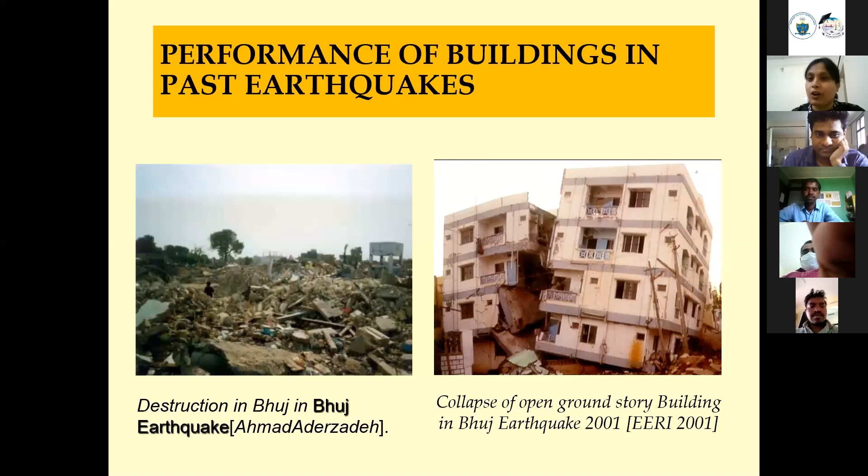There is nothing remaining. The next photograph is of RC buildings. There is huge damage, it cannot be used, it is not usable anymore. But there is not complete destruction because of its strength, and by our intuition we know that RC structures will be stronger than masonry structures. It's our intuition, we have seen it over the years, and now I will talk about what makes it stiffer and stronger.

These two photographs are of high-rise multi-story apartments. You can see on the left the collapse of the Taksila apartment. Those were identical twin towers, but one has completely lost its ground floor, so it loses one complete story, but there was not complete collapse. On the right side, you can see there is an overturning kind of moment, and it actually overturned on the front face. Why this happened, I will discuss.

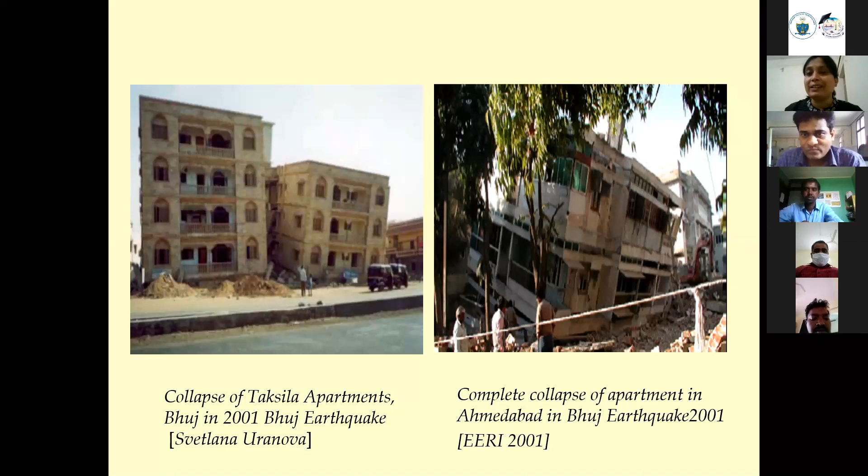So after looking at this, the question in my mind was, why did it happen? What can I do? Later I came to know this is called seismic risk assessment. Why do we do seismic risk assessment? It is to actually quantify the loss in terms of economic loss and life loss, or even the damage or severity to human beings that is going to happen for a particular level of earthquake.

Or let me say, ground shaking. Why do we need to understand and quantify it? Just to prepare for the worst. How can I help? How can I reach out to the people if such things happen?

You know that 80% of Indian land is seismically vulnerable, and India is one of the most seismically active regions of the whole world. So people who love to study earthquakes, they come to India.

So quantification is for long term and short term mitigation policy. And for important buildings, there are insurance companies, so they need to know the risk beforehand. They give the insurance, like our car insurance and so on. That's why we need to quantify the amount of losses, which we call seismic risk, in terms of economic loss and life loss, for mitigation policies.

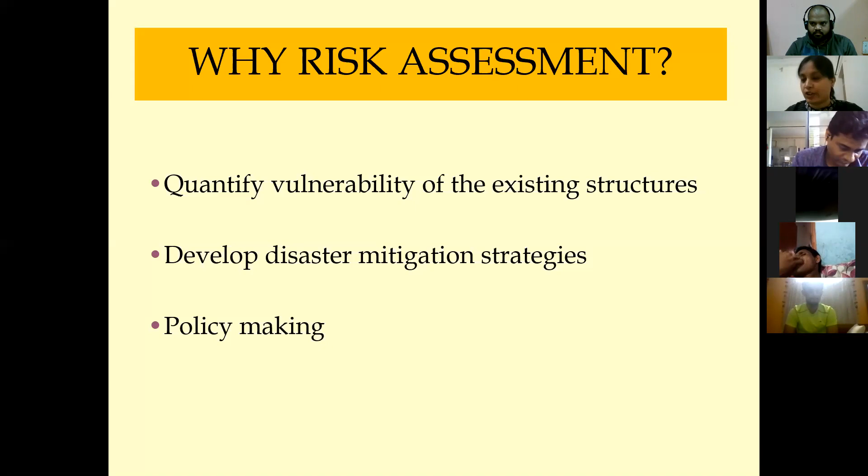Now, seismic risk is a combination of three different functions. What are those? Seismic hazard, seismic vulnerability, and exposure. It's a combination of these three functions.

Now, one by one, I will explain what seismic hazard is and how we can quantify it. As a civil engineer, we need not only to understand... what is it, two participants raised their hand, what happened?

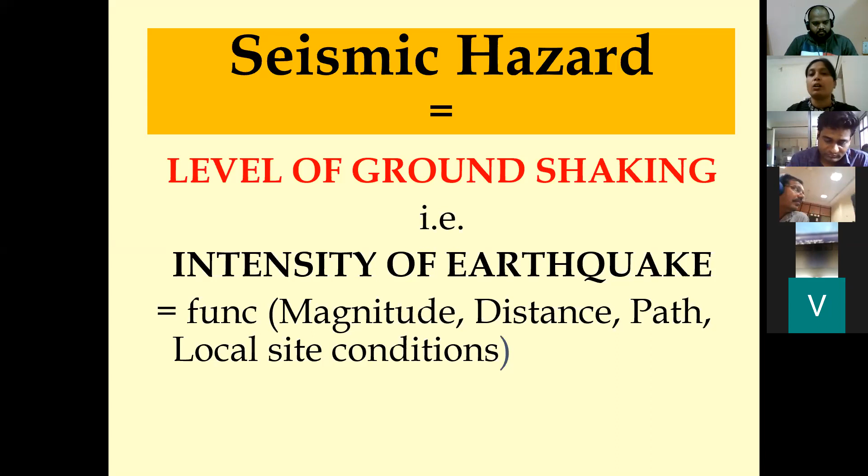How do we represent seismic hazard? We can do this through the design response spectrum, which is well known to all of us. It gives the peak response of a single degree of freedom system under earthquake excitation, for numbers of earthquake excitations, and then it has been smoothened using some statistical analysis, so that in the design office it's very easy to design for the maximum acceleration.

Why are we interested only in acceleration as structural engineers? Although seismologists are very much interested in fault size, length, magnitude, as structural engineers we are very much interested in acceleration. The reason is, being a structural engineer, we want to know how much is the external load coming to my structure. And the stress caused by the external load should be less than the internal capacity of the member, then my structure is safe. So during an earthquake it is not a force...

Earthquake only vibrates the ground, because my foundation is laid on the ground. When the ground moves, since it is firmly clipped with the ground, the foundation also starts moving and there is a disturbance. As per Newton's law, it will want to remain in the state it is in, so it will try to stay in the steady state and oppose this disturbance caused by ground shaking. To do that, it creates inertia force.

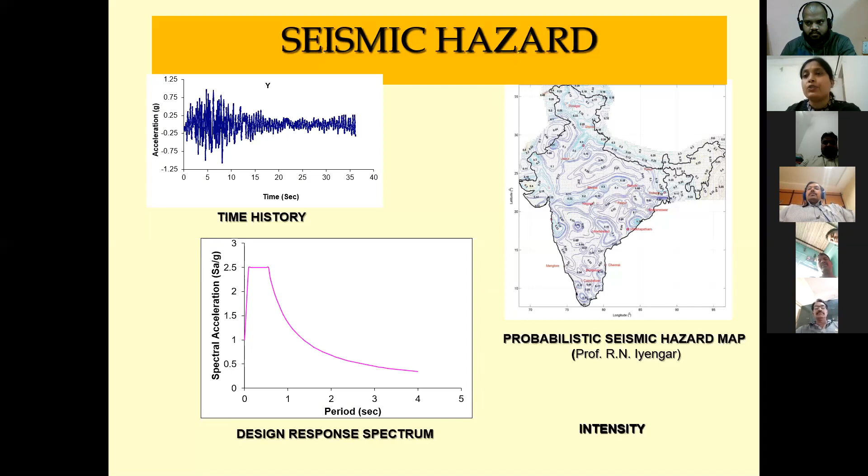Historically, seismic hazard was not represented well because there was no good instrumentation that could give us these quantities correctly. So the historical way of representing seismic hazard is the seismic intensity.

After an earthquake occurs, a team or group visits the site and nearby areas and tries to see three things. First, how the people felt. Some will tell you they didn't feel anything, others will say it was so violent they had to come out of their home. So what is the expression of the people? That's why it's very subjective, and we cannot take just one human response from one person. The group has to consist of a number of people interviewing a number of people. The first is to find out the response of the local people.

Then we try to see the response of objects like a TV set, or since these scales were derived in European countries, the chimney was another very important thing for each home, so they see where the chimney has gone down. So those particular things, what is their condition, they try to see.

This is the second observation. The third, which is slightly complex, is the damage to the surrounding structures. Now damage can be anything - even a small crack in my phone screen, I might say 'oh my God, it's so huge.' So how can we define damage? They define a damage grade.

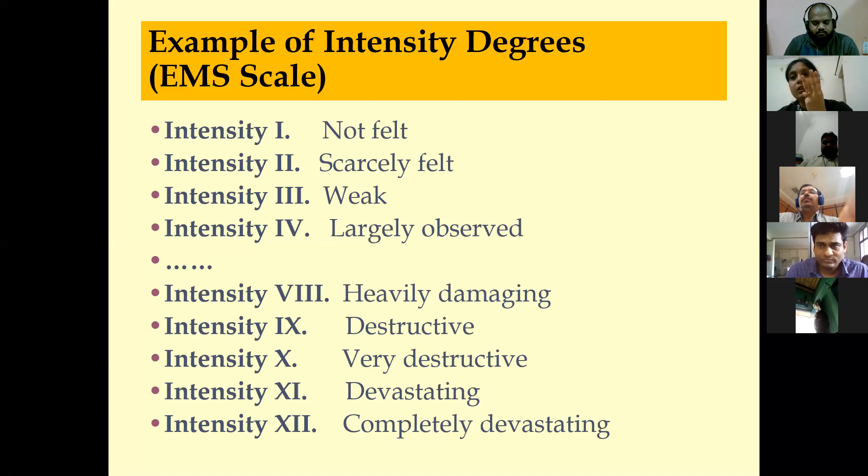Based on this, there are three observations: one on human beings, second on objects, third on damage to surrounding buildings. In the description box they have given these three things I told you. This is readily available on the internet, and if you don't have it, I can share these details with you.

For quick reference, I will go to the damage scale, intensity scale. It's damaging - the description itself says it's damaging. How damaging? Most people are frightened and try to run outside. Many find it difficult to stand, especially on upper floors, because acceleration increases along the height. So at the top floor, it accelerates very high or displaces very high, so they could find it very difficult in upper floors to stand.

Now the second point is observation. Furniture is shifted and top heavy furniture may be overturned. The third point is about damage on the buildings. So they have said many buildings of vulnerability class A suffer damage grade 3, and a few suffer damage grade 4. Now there are three things I couldn't understand.

First, we want some number - what do you mean by many buildings? 100 buildings, many, maybe 80, 50? How do we quantify many buildings? This is one confusion. Then the vulnerability class - what does it mean? What is vulnerability class? And then third is damage grade 3 and few of damage grade 4 - I didn't get it. So three confusions are there. Let me go to the next slide to explain that.

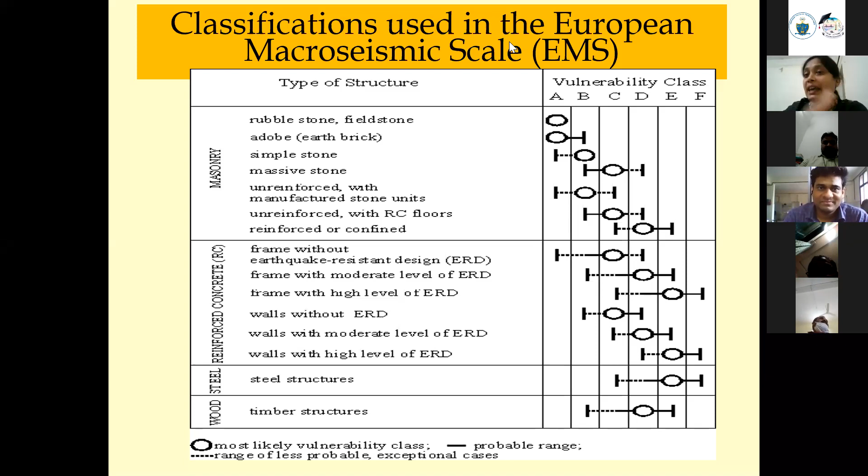Now I know you have a question - what is vulnerability itself? I will tell you. So the vulnerability class decreases as we go from A to F. So this point that vulnerability class A suffers damage grade 3 or 4 - vulnerability A class is done.

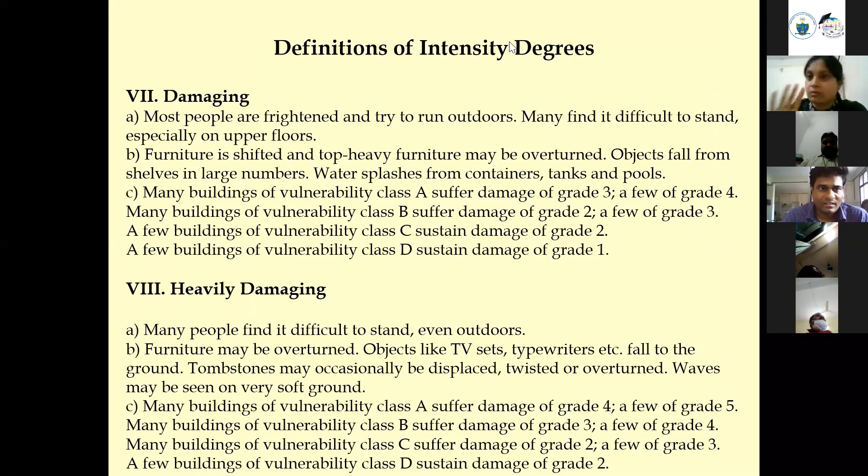What is damage grade 3 or 4? Here they have shown description with photographs. What does it mean? Damage grade 4 is very heavy damage - heavy structural to very heavy non-structural damage. And you can also see - I'm not able to see the top - yeah, this is for masonry buildings.

No, this is for masonry buildings. And similarly, a chart with damage grade definitions has been given for RC structures, wood structures, and steel structures. As we know, if the construction material changes, their damage pattern will also change. That's why they have given a similar table for different construction materials.

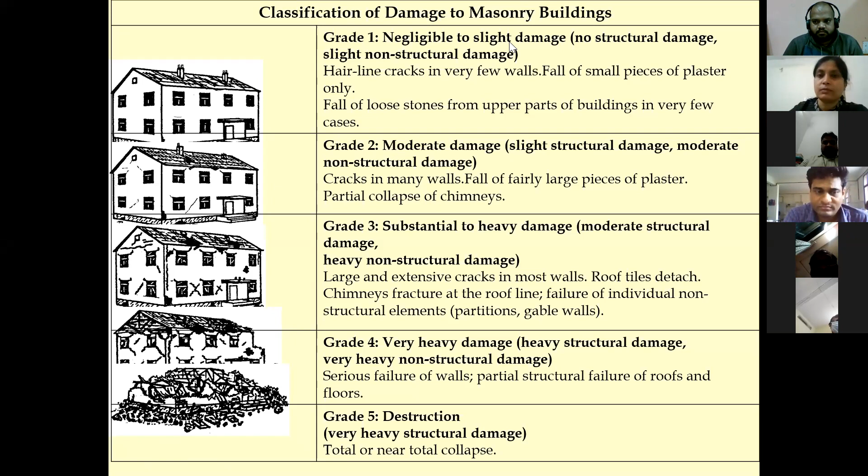So damage grade and vulnerability class are known, damage grade is known. Now I am concerned about how do you classify or quantify many, few, most. This is given here: few means 10 to 40%, many means 40 to 60%, and most means 60 to 100%. It's all given in that description itself.

So before going to the site after an earthquake, we have to take one photocopy of this set and try to assign some seismic intensity zone. As we move out from the origin, radially go out, the seismic intensity will actually reduce. Near the epicenter, it will be the highest intensity scale, probably 9 or 8, and then it will generally follow lower numbers. So is it clear how we are defining seismic hazard, and how we are trying to quantify it? The one exception is this intensity scale, which is based on our observation.

Why do we rely on this today also? Because instrumentation can go wrong - it may have some disturbance, or probably under huge destruction, it may stop working. But this, although it has some subjectivity, is based on our own experience, so it has reliability much higher than those instruments. Till date, we also rely on this too - not all alone, but we combine this instrumentation along with this intensity measure.

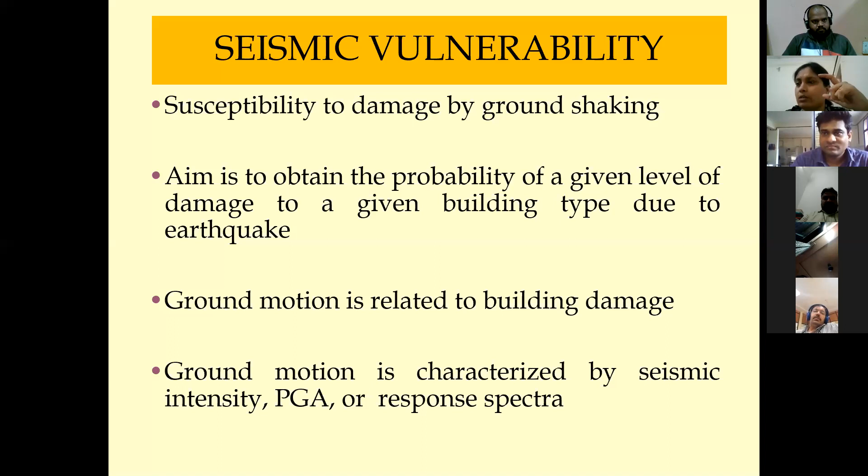Now there are mainly three types of vulnerability assessment. One is empirical, another is hybrid, and another is analytical. Hybrid is kept in between, as it's the bridge between empirical and analytical.

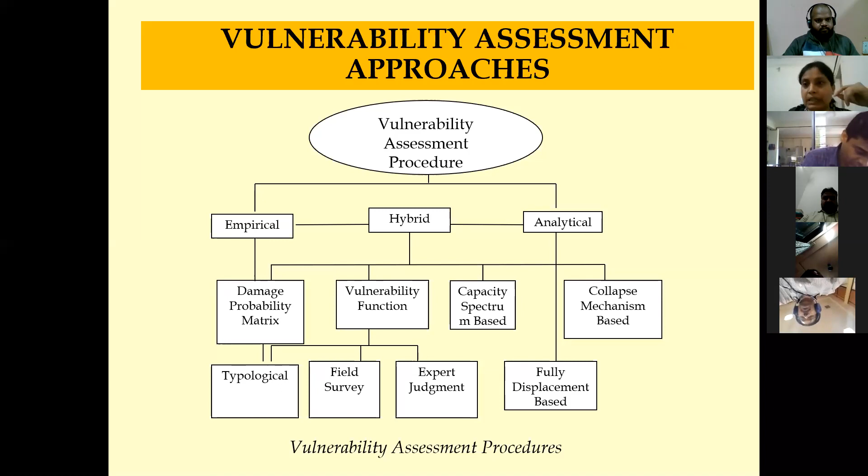Empirical is based on our observation. In seismic intensity, we go to the site after an earthquake and try to assign some seismic intensity for each zone. Empirical formula is similar to that. We represent it as a damage probability matrix or a continuous function.

In the continuous function, the x-axis is the ground motion, which can be acceleration, velocity, or displacement, and the y-axis is the probability of damage. So vulnerability functions are continuous, while the damage probability matrix consists only of discrete isolated points.

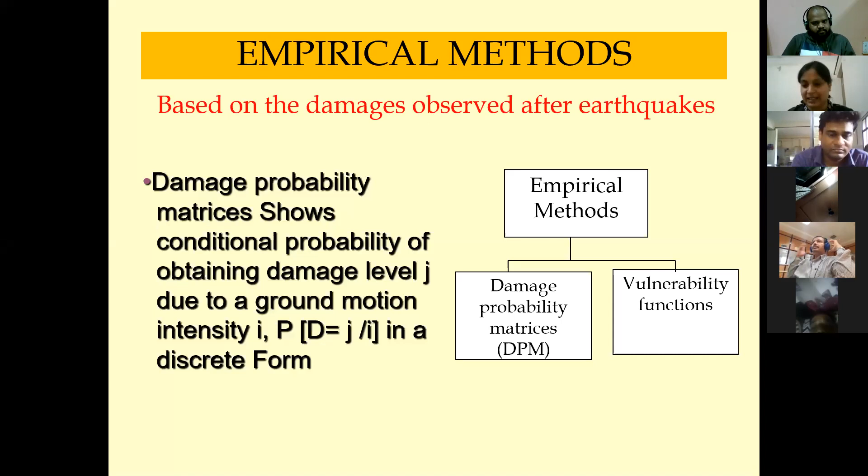I don't want to waste this opportunity, so before I talk about seismic risk assessment, I would like to tell you something about modeling of infill frame buildings, because that is incorporated in the 2016 edition of IS 1893, and there is a lot of confusion. As a structural engineer, designer, and proof checker, I encounter a lot of things - it's not that designers don't want to do it, probably they are not convinced and not well informed how to do it. And if we don't do it, what risk are we imposing on the final performance of the structure? So before seismic risk assessment, I would like to talk about modeling of infills.

Before I start, I always ask myself whether it's worth following through on any task - is it important to do? So here also I'm following the same approach. Why do we model? If we don't, what will happen? My topic is the effect of infills on performance of RC frame buildings.

The very first point is that infills have a unit density of around 20 to 22 kilonewton per meter cube, which is very close to reinforced concrete - so it is very heavy and at the same time stiff. Infill walls are nothing but unreinforced brick masonry walls. If we incorporate infills, it gives us very high stiffness, which is good. It also increases strength - and how strength can be increased is the next topic.

For this particular corner, left-hand corner plan, 4-story building, I have calculated that due to incorporation of infills, the strength of the bare frame increased 2.2 times. It's so high, and stiffness increased 35 times. That is always good. I am not taking into my design that it can bear so much load, and actually in practice it takes higher load than my assumption. So my design is very conservative.

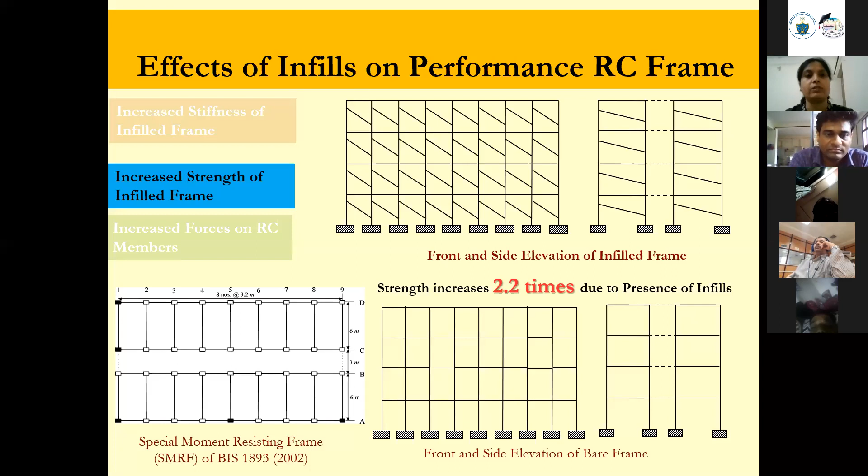Yes, very good. But at the same time, the presence of infill actually increases the shear force in the adjacent column. Why does this happen?

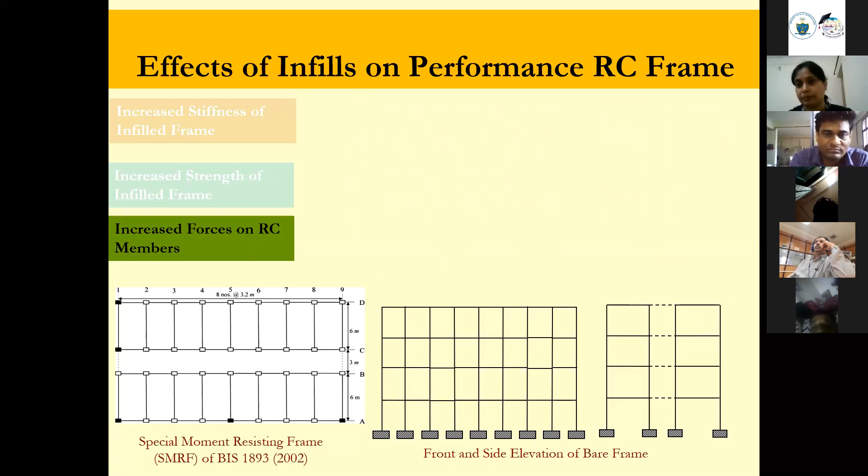When there is relative displacement, this lateral force tries to push the infill diagonally. But every force has an equal and opposite reaction. To remove that lateral pushing, it applies a tension. Because of this diagonal tension, there are two components: one vertical, going to the beam above as shear in the beam, and the horizontal component of this diagonal force goes to the shear force at the column face.

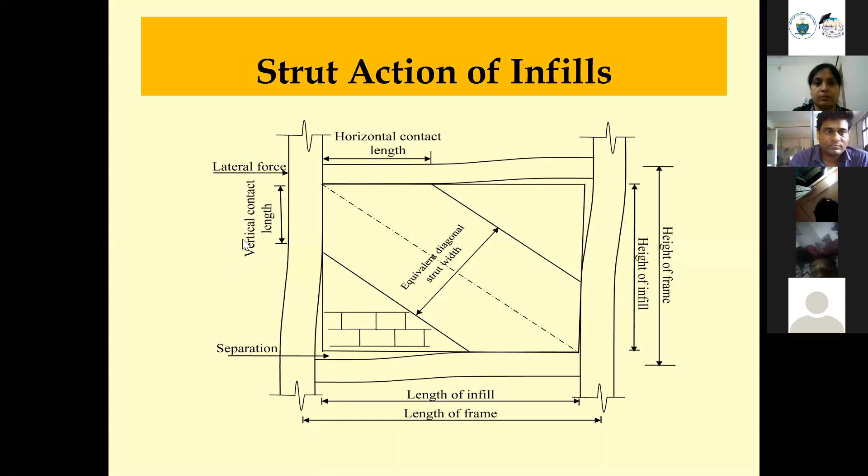So now I will talk about, because of infill, the probable failure modes of the surrounding RC frame. The very first one is shear failure of the RC column, which I told you about, because of this horizontal component of the diagonal force, which acts as shear force to the column. This shear failure of the RC column has been very prominent in each and every earthquake, even in our experiments in the lab.

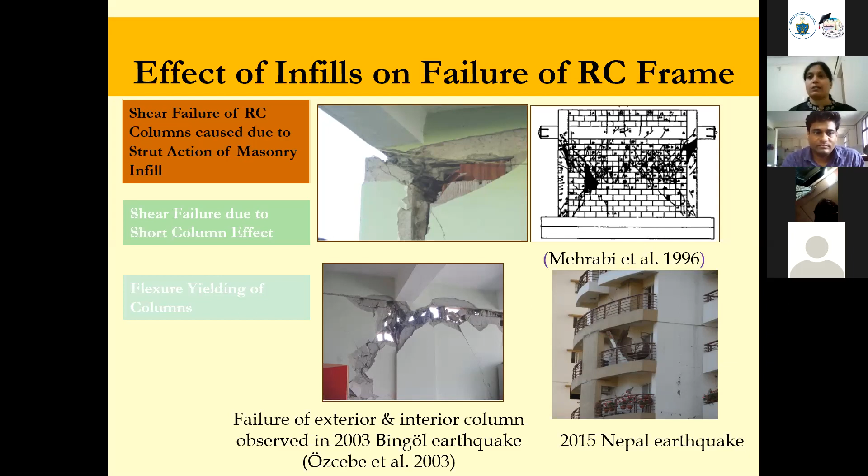Everywhere it is very prominent that this column has much higher shear force than anticipated from the design itself - additional shear force. If that additional shear force is not taken care of properly by providing additional stirrups, then the column is going to have shear failure.

In a short column, what happens? The moment and shear are interrelated, right? So if we reduce the height...

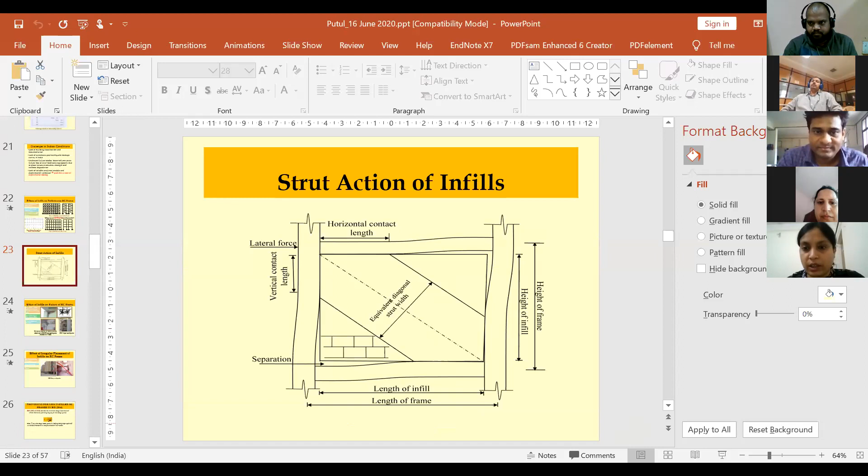Yes, we can resume from the last slide. Am I audible? Yes, you're audible. I think we're here. Okay, you can resume now. Sorry, actually there was a power cut at my place.

So we were talking about the failure which originates because of the presence of infill for the frame members. The first one we discussed was the shear failure of columns because of this additional horizontal shear force caused by the diagonal reaction of the strut member or infill member.

Then shear failure due to short column effect, and I was talking about why shear is higher in a short column. Bending moment and shear force are interconnected, right? So for the same moment, if I reduce the height of the column to half, the shear force increases 4 times for the same moment.

Top and bottom moment is 2M, right? And what is M? V into height of the column. If I reduce this height to half, then it gets multiplied by 2 into 2. So for the same moment, if I reduce the height of the column, shear force increases. That's the cause, and we never encountered this before, so this can be avoided.

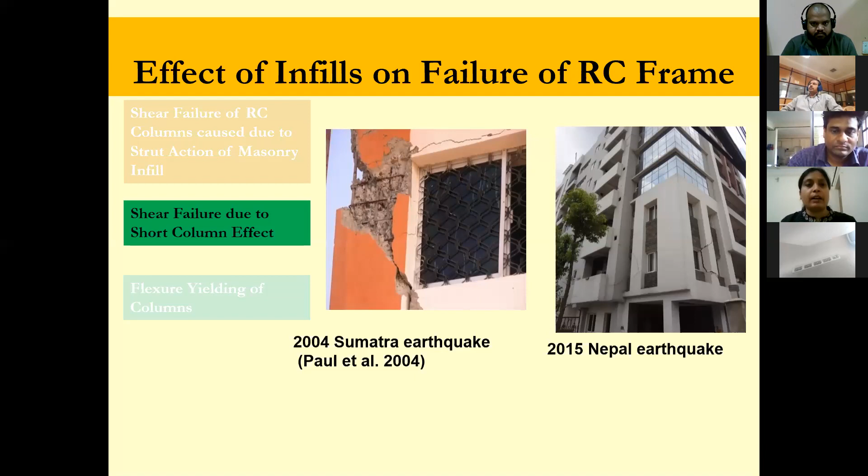So what happens is this unit hits the column and there is yielding in the column because of this hitting. So we have to take care of all this if we really want to reduce the seismic risk by reducing the seismic vulnerability of these RC frame buildings.

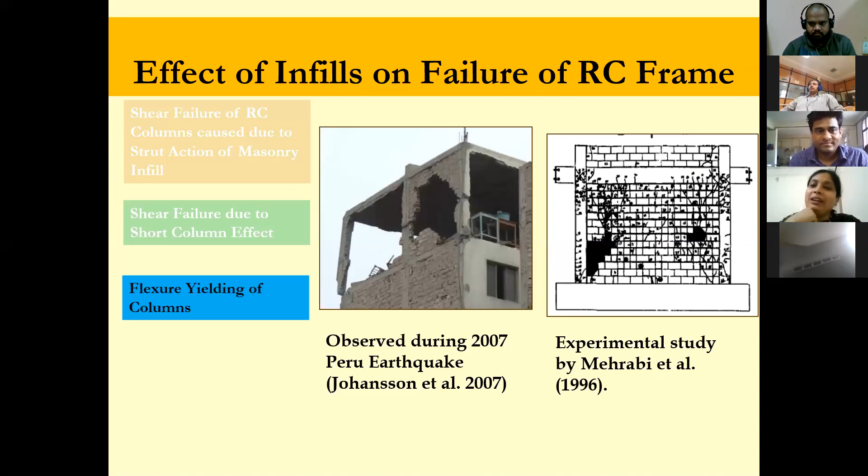Because of this opening, as I said, the unit weight of infill is almost similar or near to the reinforced concrete, so it is very heavy, its strength and stiffness are both heavy. If we remove it entirely for one floor, that makes it vulnerable.

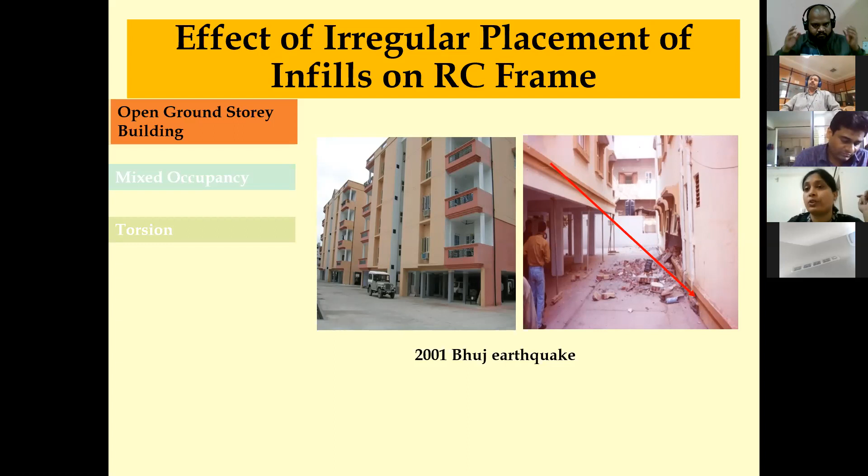There are two types of things which can happen. One is soft story, which is all about the stiffness difference between adjacent stories. The other is weak story, which is all about the strength deficiency between the top and bottom stories. So this open ground story is one thing that makes the infill frame building more complicated.

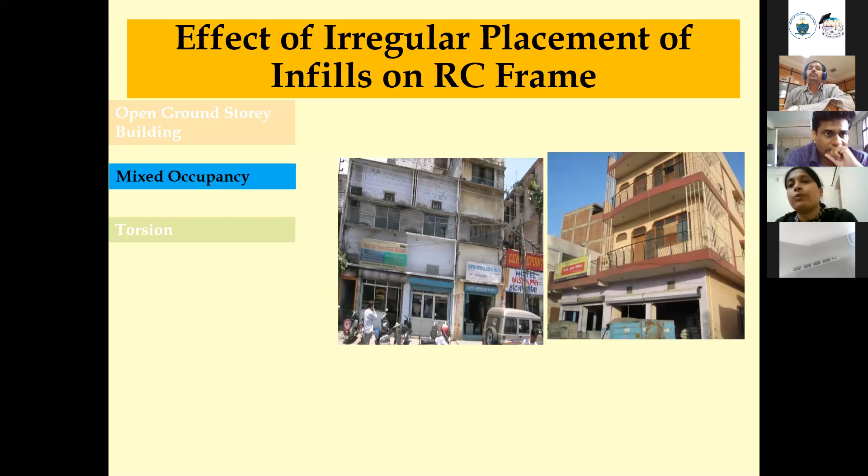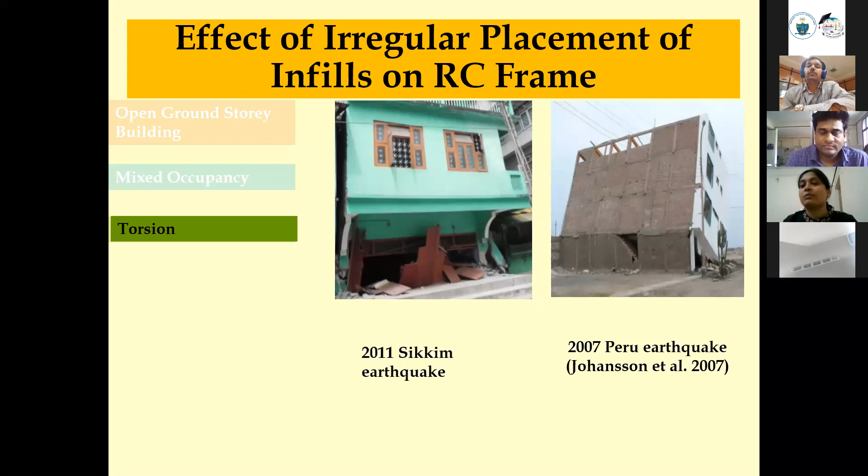So these are the things, now we have seen the problems. That means we should take care of these small things that will reduce the vulnerabilities very considerably. What are those?

I will talk about IS code 1893 and 13920 specifically, because the role of IS codes is to give a very simple solution of a complex problem, so that it is easy to use in day-to-day life. Even if we don't understand the nitty-gritty detail of a long equation, we can still incorporate that effect in our design and solution.

One example is the capping on the time period. We know the time period formulas for bare frame, steel bare frame, RC structure with reinforced shear wall, and RC structure with infill wall are all different because they are empirical formulas. If we closely check our computer model, we will see that whatever sophistication we use, the time period we get from the computer model is much higher than what is provided in the code.

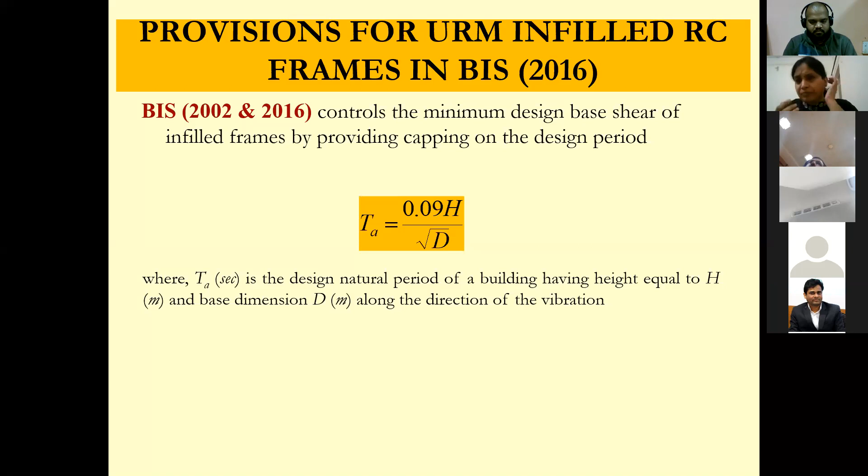Why do we have to trust the empirical formula of the code? Because it comes from real life experiments, and as I said, we cannot model the exact structure itself because of many things. We cannot model the damping properly. Damping is a very cumulative thing - friction with the main structure with the air, friction between the cracks, friction between reinforced to reinforced, friction between concrete and steel. It's a collection of so many things that we actually cannot model the damping. This is just one example, and there are many such examples. That's why we have to follow this minimum design base shear criteria given by the IS code.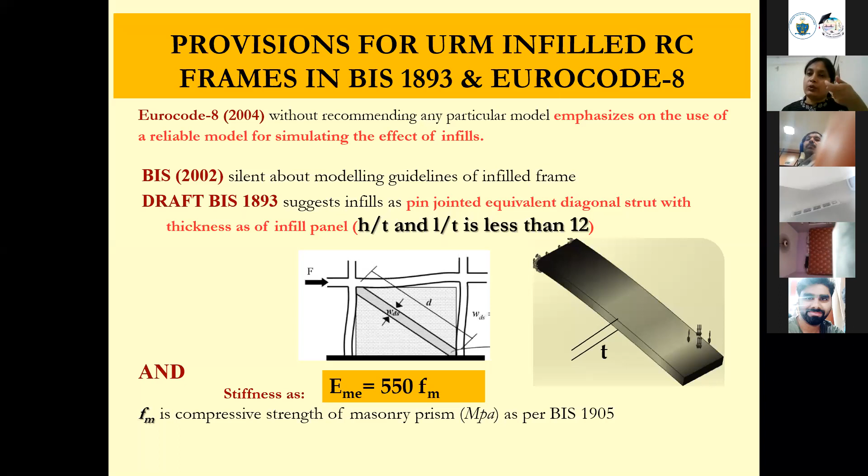So we can use this. What about the width of this diagonal strut section, and what will be the thickness? The thickness will be the same as that of the original infill, provided it has no slender property. Remember while designing columns, we check whether it is slender by checking whether the height to thickness and length to thickness ratio is less than 12. If that is true, we can use the thickness same as that of the original infill wall.

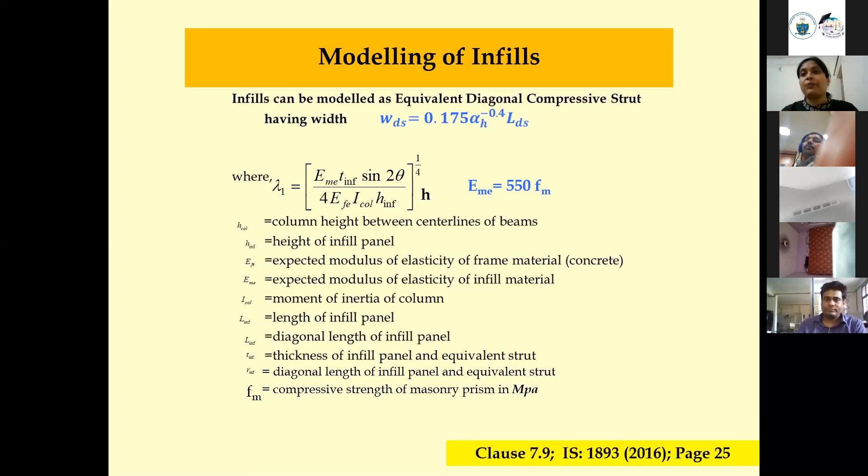So it's pretty clear. For your quick reference, you can check clause 7.9 of IS 1893, on page number 25, where everything is given. The expected modulus of elasticity of infill has been related with the compressive strength of masonry prism. The masonry prism test is given in IS 1905, but they have replicated that formula in IS 1893, so we don't have to refer to 1905. If I follow only the 7.9 clause, my job is done.

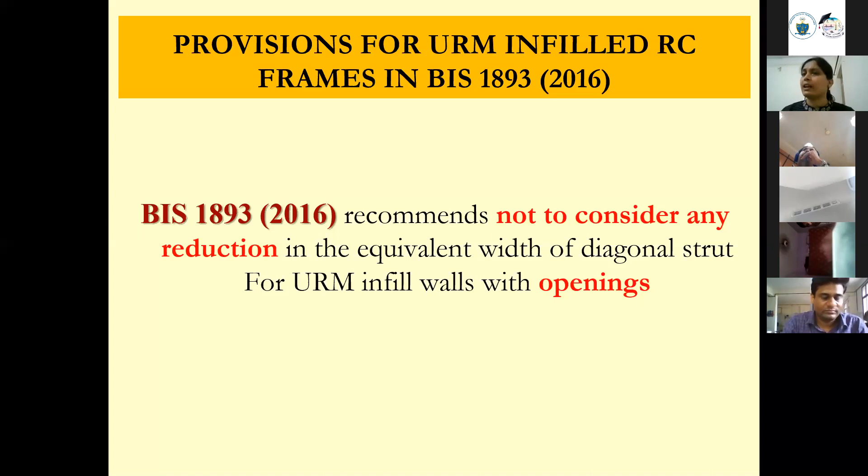One thing that is actually a question is that infill walls are not solid - we have door and window openings. But IS 1893 says you don't reduce the width of the diagonal strut even if there is a door and window. Many codes, including Eurocodes, suggest some kind of reduction in the width. But if we don't reduce that width, from the perspective of design we are on the conservative side, so this is quite acceptable to me.

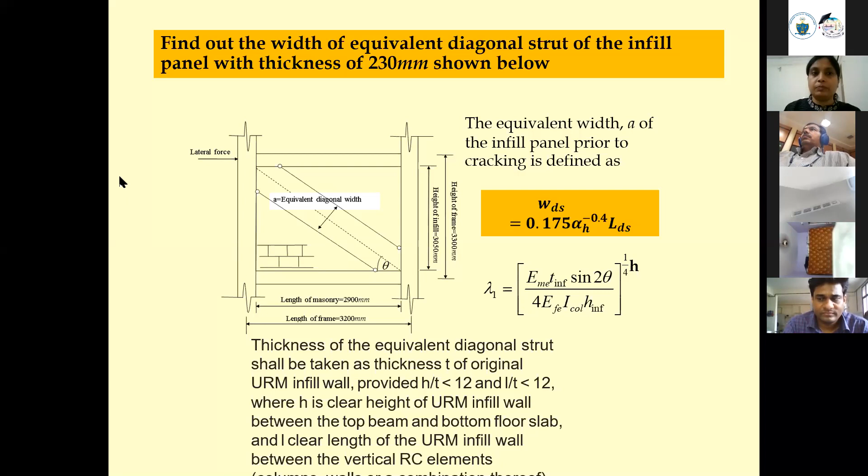This is some kind of example which I tried to solve to show how easy it is to find out the diagonal width. Thickness is same as that of the original wall, and we fit it into our analysis. Only this much of effort is required.

There is another thing. In the 2002 version of IS 1893, it says when you have an open ground story, either you go for nonlinear dynamic analysis to actually know the difference between stiffness and strength of the story above and below. If you don't want to do that, because nonlinear dynamic analysis is difficult to perform in day-to-day design office work - it's more of a research component - they said you can instead design the columns and beams of that open story floor for 2.5 times higher design shear because of the earthquake. I will talk about that another story, whether that gives us performance same as a uniform infill building, someday later.

But in 2016, that clause has been removed, and it has been entirely left to the designer to check and assure there is no irregularity of strength and stiffness. How irregularities are defined is given in Table 6 of IS 1893. What is soft story, what is weak story - those irregularities should not be there, even if you allow the open ground story, without giving some prescribed measure which was already there in 2002. They have removed it, and this irregularity should be corrected in seismic zones 3, 4 and 5, without mentioning how we can correct those measures.

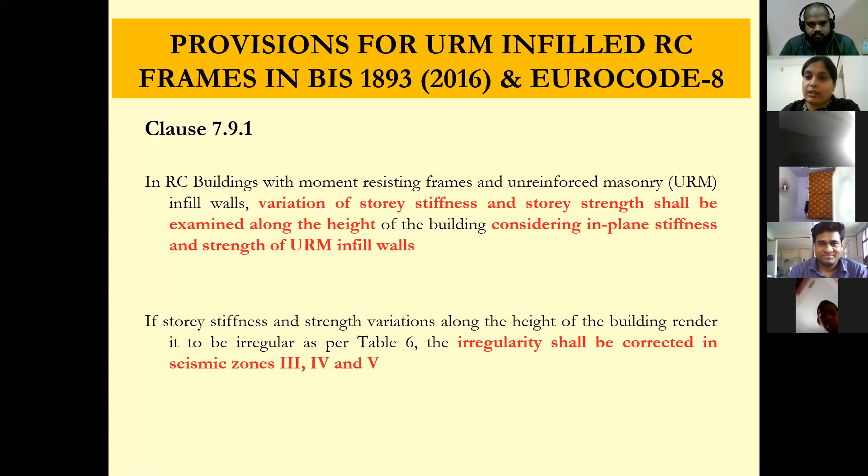So this is all about the code. Now I will show you something more than that.

But in mortar there is a huge amount of water. With time, water evaporates and there is a slight gap. Even if there is a slight gap, what happens? The load cannot be transferred in air - for load transfer we need some medium, right? So whatever load is on the beam cannot be directly transferred to the infill wall. So the infill wall is actually acting as a non-structural element here, because it is not taking part in the load transfer mechanism of the entire structure, right?

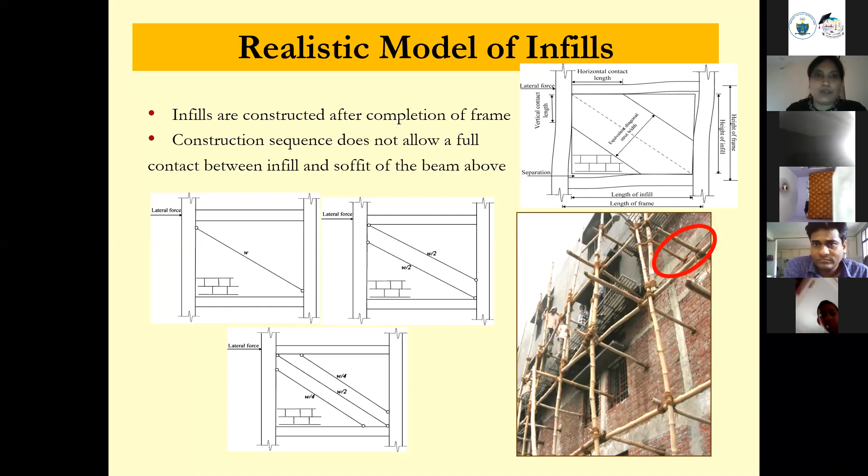So I have taken 3 models, and I have taken an eccentric model - not a concentric model, because it is not actually going corner to corner. Because of the construction sequence, there is a gap between the top beam and the infill panel itself, so it is actually near the beam-column joint. I have taken these 3 models and tried to find out which model gives the actually observed behavior.

I have taken some experimental results and tried to simulate them using these 3 different models - 1 strut, 2 strut, and 3 strut model. Surprisingly, if I model this using one eccentric strut, I can predict all the observed results which we got from experiments.

And you can see here, because of this right hand side diagram, because of this diagonal - the horizontal component of the diagonal, this R cos theta - it is the extra force on the column. And I said, if I can provide the required stirrups for this extra R cos theta shear force, then my column is safe. Then how do I know what is the extra R cos theta?

Cos theta I can find out - it's from the geometry of the panel itself. Theta is known. Now I have to know the R value. R value is the strength of the infill material.

For my study, for my research, I have gone through the entire literature starting from 1958 till date, and it gave me 4 distinct failure modes - that means the infill panel can fail in these 4 modes. Among them, sliding shear, which I told you causes yielding at the column because of bed joint sliding of the infill panel, is the most common failure mode.

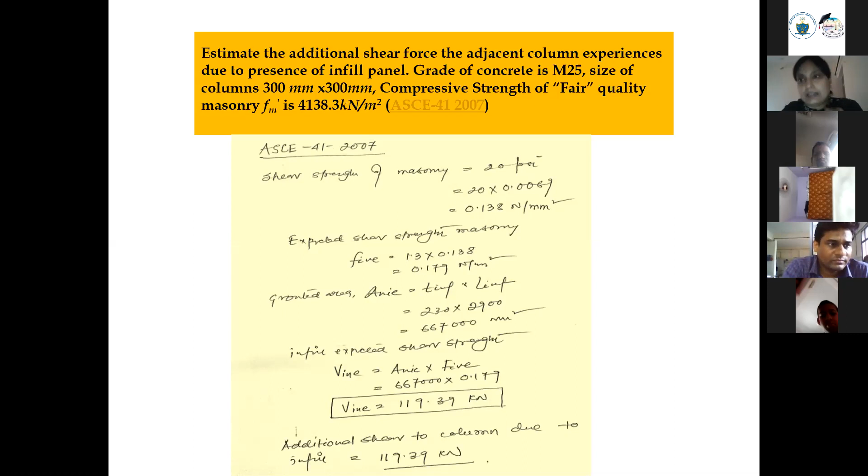And we know if the column is safe, then the entire structure performs very, very well in the same way. And to show that - since we don't want to model the infill panels - what happens, what we actually get instead of what we should get.

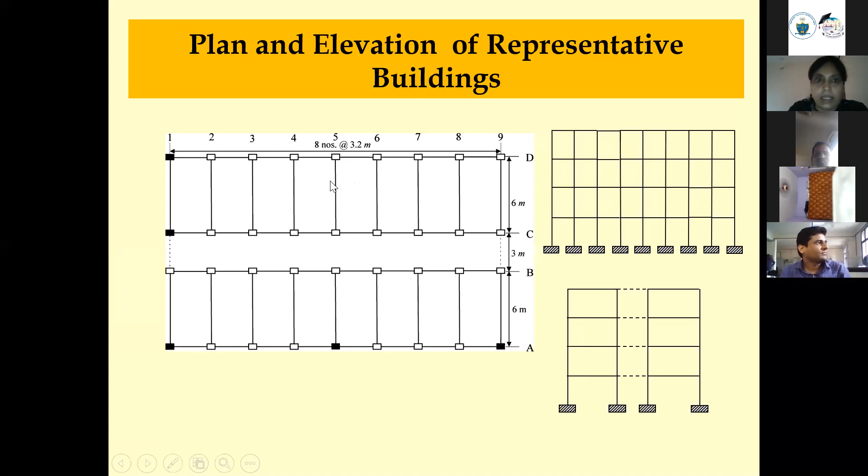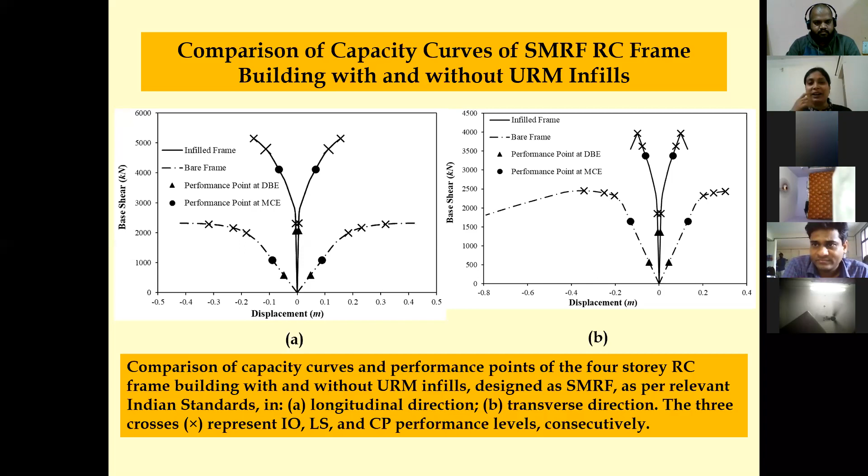How to prevent beam column joint from yielding during seismic loading and poor workmanship in RCC building construction? Beam column joint - IS 13920 specifically talks about beam column joint reinforcement. If we follow that, it will not yield.

Okay ma'am, why was zone factor taken as Z by 2?

Okay, Z by 2 - from a conceptual perspective, the load factor 1.5 and the zone factor together actually represent the maximum considered earthquake, which is the theoretical upper limit of the earthquake possible, with a return period of 2,500 years. That is the theoretical highest considered earthquake. So this Z along with the load factor of 1.5 actually represents the seismic acceleration at that particular location.